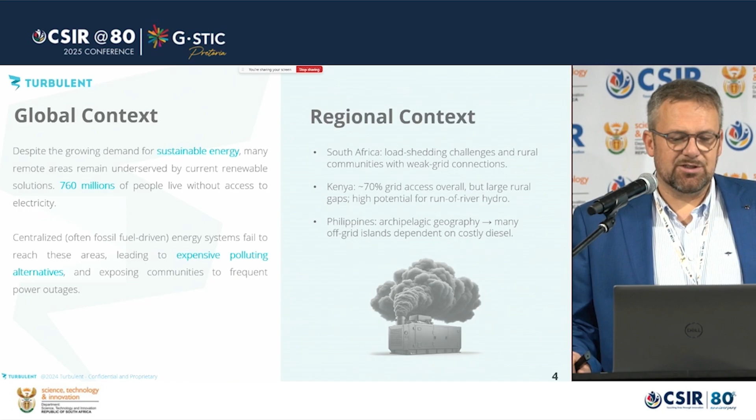The Philippines, due to their 7,000 islands, all their systems are off-grid. The most easy way is you put on each island a small generator and they have energy. That's what we want to avoid.

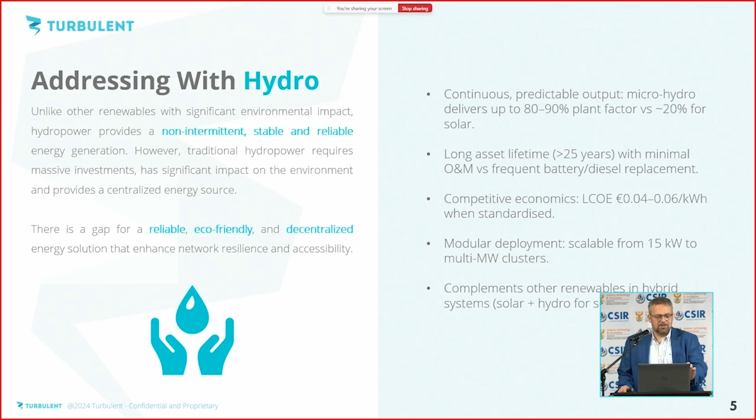What is our solution? Hydropower. So we address it with hydropower, small hydropower. We use what nature gives us. If we have a small river with 1.5 CMS of water and a small drop, we can produce energy locally - not centralized, but really on the spot where people need the energy. We don't need big dams. You will see it in the next slide.

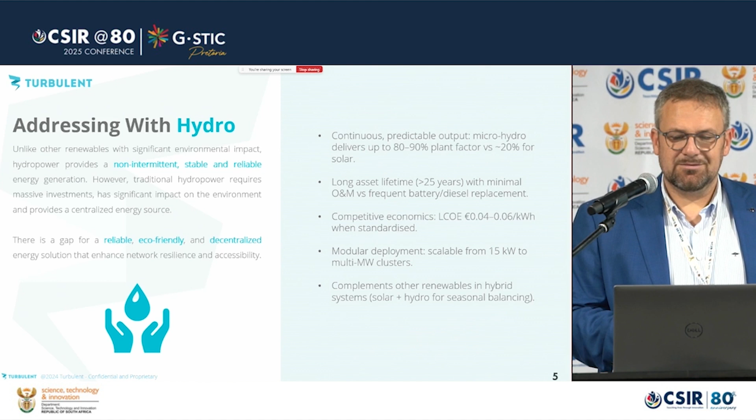So we build it on the spot, really on site where they need the energy. We don't build big dams, we don't need 4 years of permitting phase. We only need 6 months to build it and bring them the energy they need. If they need a small amount of energy now, we can deliver 1 turbine, 2 turbines, whatever is needed. If they need more in the future, you just add a few. So no big transmission lines, no big dams, no harm to nature, just a small footprint aside the river, and we can go on with it.

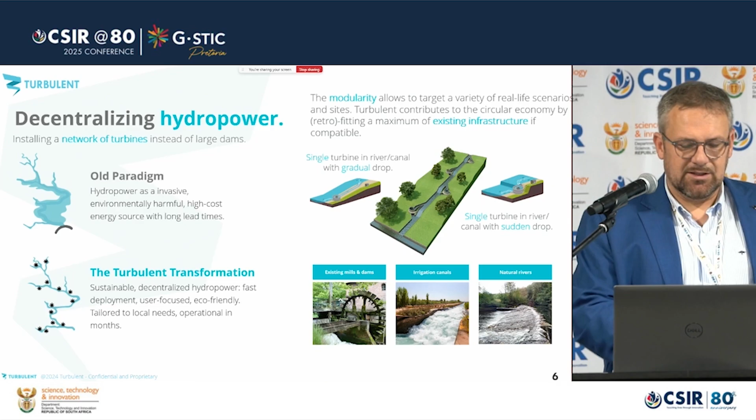How do we do it? We take the water out of the river, we drop it into our basin. The basin makes our turbine spin, and the energy goes back by our cabinets to the population.

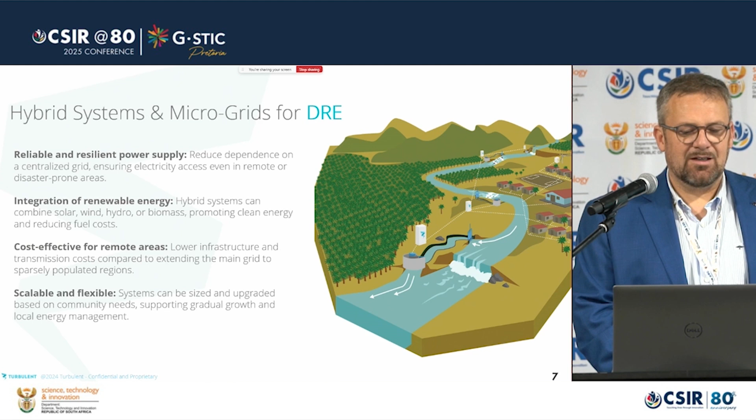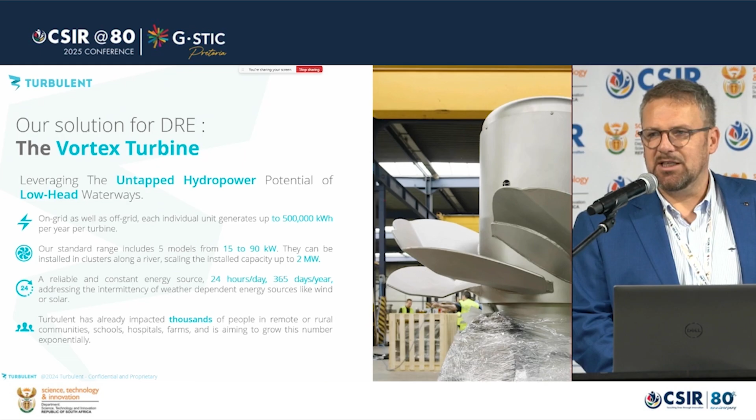How does our turbine look like? A little picture of it. So we need a generator, completely submerged. We need the impeller to make it spin, and we need a connection to the grid - or we can go off-grid, then you don't need them.

Up to 2 years ago, we made everything custom, but it was very costly. So now we've set up a standard of 5 turbines, 15, 30, up to 90 kilowatt. We can make them modular, so we can install many megawatts if needed, and if the river provides us enough head and enough flow.

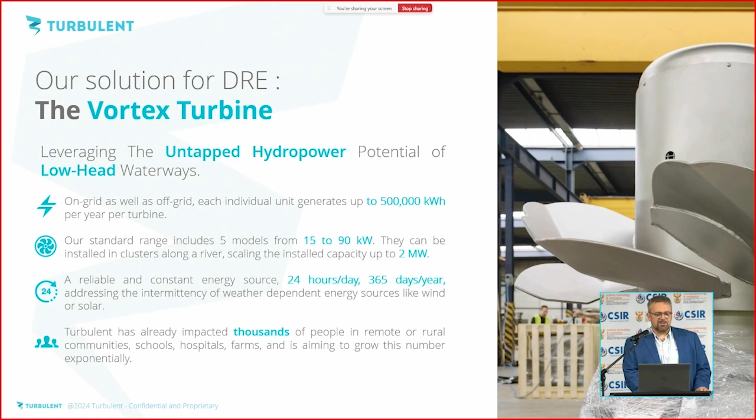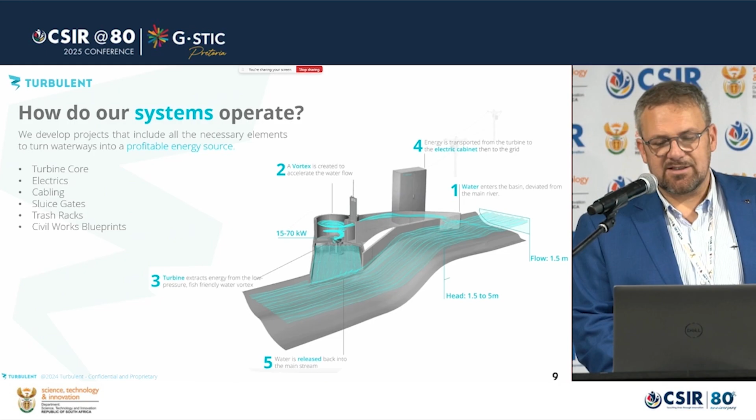A little bit, as I said, how the system works. So we take it, we use the water to generate, and we give it back to nature. We are fish friendly as well, so we have made tests in the UK, and fish pass by harmless.

A view on the turbines that were sent now 2 months ago here to South Africa. So as I mentioned, we are now producing with standards, not custom anymore, so we can make them a little bit more off the shelf, which makes it cheaper and more affordable for the people who need it.

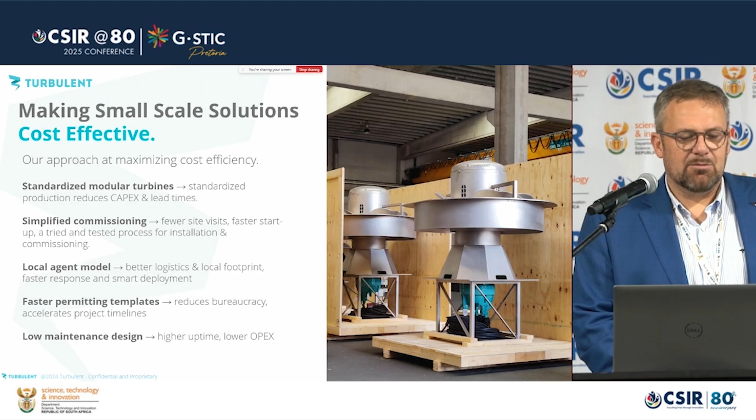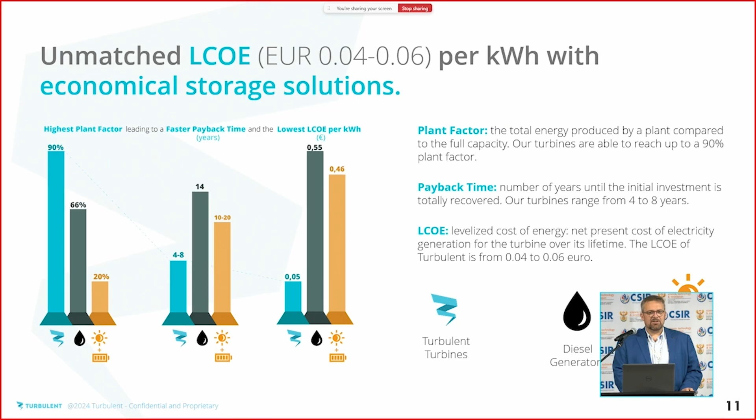Cost effective - we produce at an LCOE of 0.04 euro per kilowatt hour. It means that for a normal, good working system, under conditions here in South Africa, the payback time is between 4 and 8 years.

In contrast with diesel-fueled generators, you don't have the logistics to bring the diesel, and you don't have all the pollution that comes with it.

Where are we active? A little bit all over the world, but we realized that's too much, so now we have 3 focus regions: Eastern Europe, Africa, and Southeast Asia. If something else comes along we still pursue it, but it's not a focus anymore. Due to our capacity as a small company, we have to manage financially.

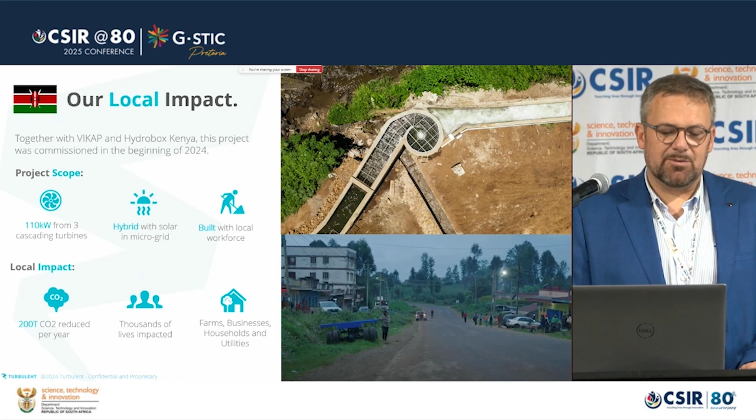The scope: there were 3 turbines, with financial support from a local partner, Hydrobox, and the Flanders program on climate change. Over there, we reduce more than 200 tons of CO2 a year. The impact is on households, and we provide energy to farms, businesses, and hospitals.

The case in the Philippines is a larger project. They are building it now, with installation by the end of the year. The turbines are already shipped - it's 8 turbines in parallel.

Why in parallel? This is specifically a modular system. We can produce enough energy here for the local rice farmers. They need the energy, but we only have a small drop, 3 meters. However, we have a lot of water because we're working on an irrigation canal, which provides more than enough water 24/7 to keep the system running. We don't involve the rice farmers directly.

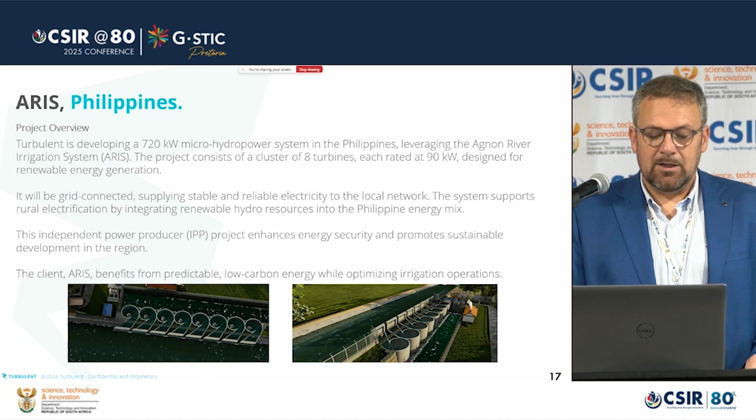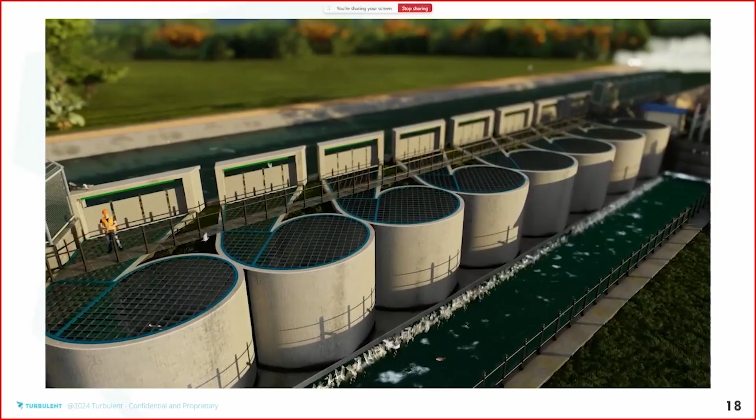We just provide the energy to the local grids so they have the energy they need, and we add more than enough to make the grid stable, which at this moment was really an issue. Here, the money doesn't come from Flanders - it's a local entrepreneur who wants to invest in this system, with a payback time of 7 years. He provides energy at 30% lower price than national energy companies in the Philippines. So it's profitable to go on with it.

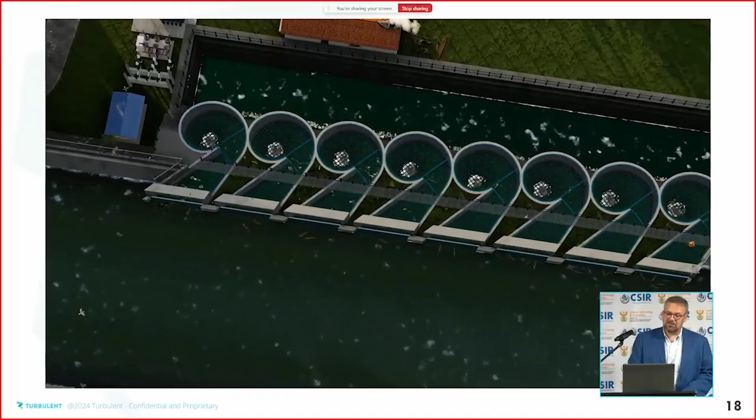This gives a little view of it. We use the water of the irrigation canal, let it pass through our turbines, and give it back after the existing dam. Why the existing dam? They build one every 3 kilometers to get enough irrigation water draining to their rice fields. Now we have an upcoming project to deliver the same system on each dam over the next 2 years.

Our local impact here is the same - we're on grid, providing energy to the local grid, making it reliable for everybody. Where is it used for? Just for local people, nothing more, nothing less. The irrigation canal was already there, so construction was minimal.

Third case: South Africa, KwaZulu-Natal. Two farmers wanted to invest in reliable energy to run their irrigation pumps, so they invested in the 2 turbines we are installing on site. You'll see a picture on the next slide.

Here, the same - due to load shedding they had issues, and by providing more than enough energy to their local system and grid, we can go off-grid for them, and when there's excess energy we send it back to the grid to stabilize it. We reduce almost 1,000 tons of CO2 every year here.

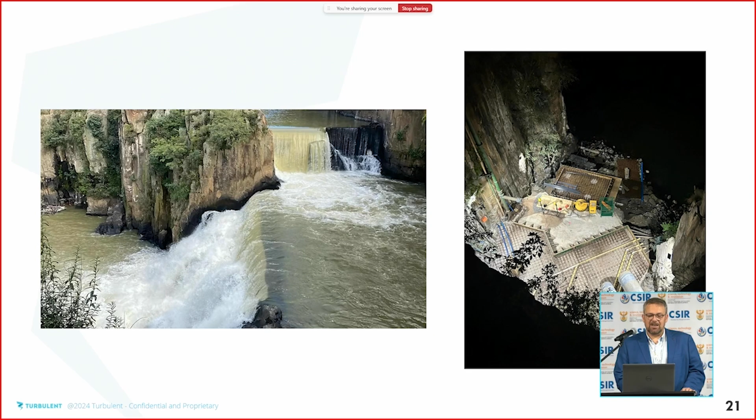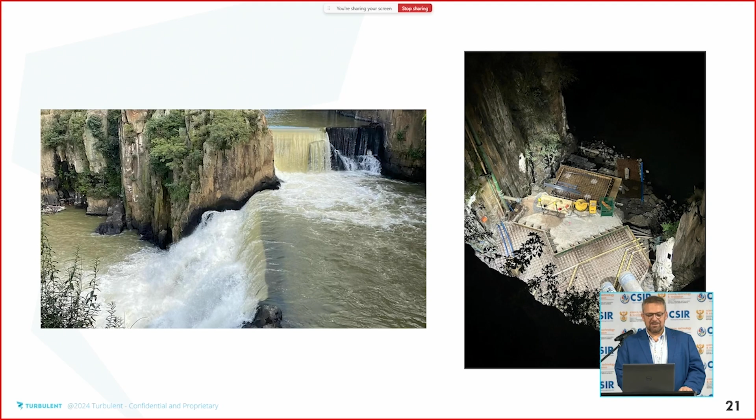No dams needed - we use what nature gives us. This is an existing waterfall, a big one, where we install right on the cliff, as you see in the picture. It's 30 meters deep, quite a challenge to build, but it will be built and finished within 1 month, so it's feasible. We use the water as it is, no dams, just take it and give it back to the river.

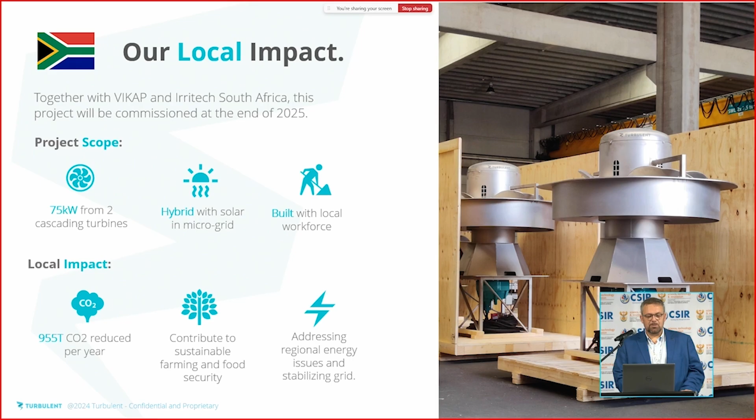We needed a pilot case here in South Africa to show that we can work hybrid, because that's essential for the future. Don't think it's only solar, don't think it's only hydro - if we combine them, we can deliver energy 24/7 for everybody. This is the proof, a pilot case that will be in use within 1 month. The scope: 2 turbines here in South Africa, hybrid with solar, paid partly by Flanders, partly by an independent farmer, running within 1 month.

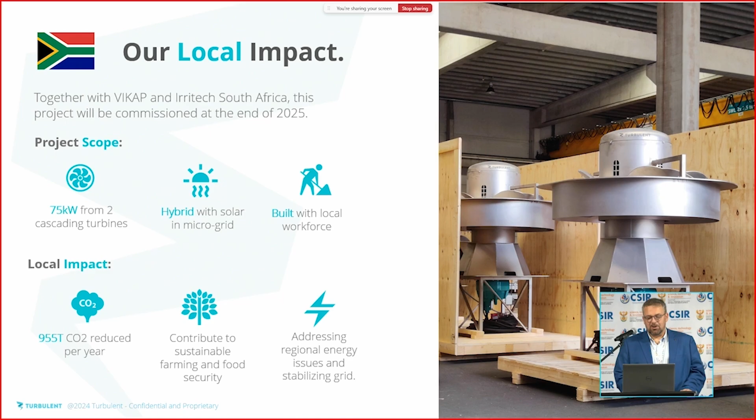What did we learn of it? Three things. First of all, technical.

Custom is one thing, we still can do it, but why standardize? Because it's cost effective, it lowers the price. CapEx is most of the time an issue for investors.

In Europe, they want to invest more and they think a little bit further. In Africa and in Asia, the CapEx needs to be very low because they will choose the most cheap and fastest solution. That's why we go for standardized solutions, standardized components off the shelf, made in a few months. Hybrid technology is also important - combine existing solutions and you will win in the future.

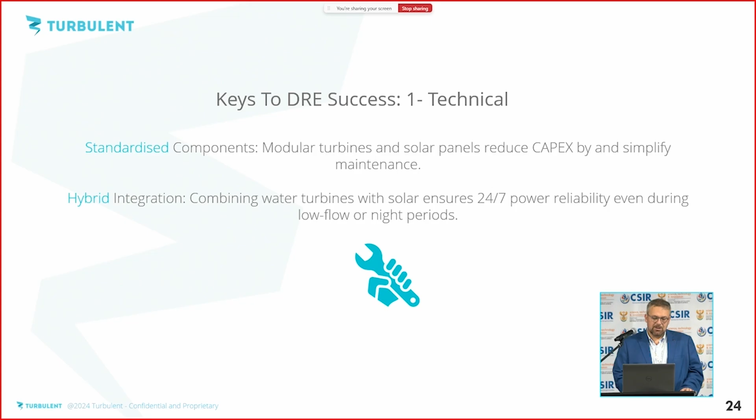Financially, don't try to build a financial case during the project - make it happen as we deliver it upfront. We provide their financial solution, their financial model, their business model, and it helps because most of the time they don't think beforehand, they think afterward. Cost effective, as I said, most of the time we need the fastest installations, so we build, install, and commission within 6 months.

Social aspect - same thing, we always try to work with the locals, for the local entrepreneurs. We need contractors, we need maintenance people, and we need local investors. We go for it, we try it out, and we see now more and more, the more they are involved, the more they are capable to continue afterwards.

The system doesn't remain dependent on us - they start to maintain it, they start to operate it, and we become less involved than before. We still keep an eye on things from Leuven in Belgium, but more and more they can do it on their own.

Stakeholder collaboration is what we are trying to do. We go to universities, we go to technical schools, we look at what is available on site to give them the chance to go on by their own, not only relying on us.

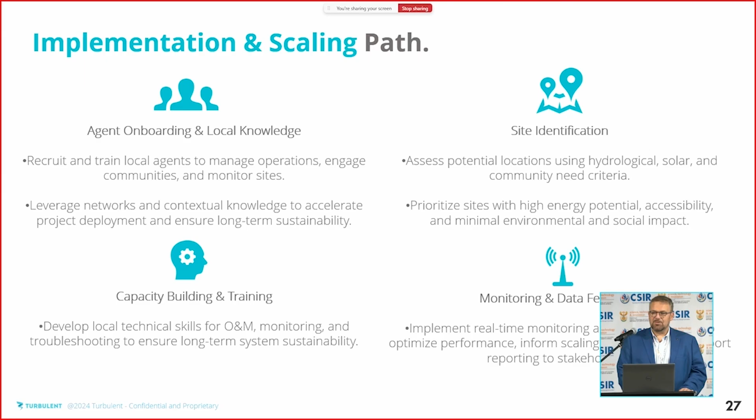As I just said, scaling up is what we're standing for. So not anymore by engaging a lot of people from our company - more and more we work with local agents. Those local agents are very well trained, they have the knowledge and they can install, invest, and commission themselves in the countries where we are active.

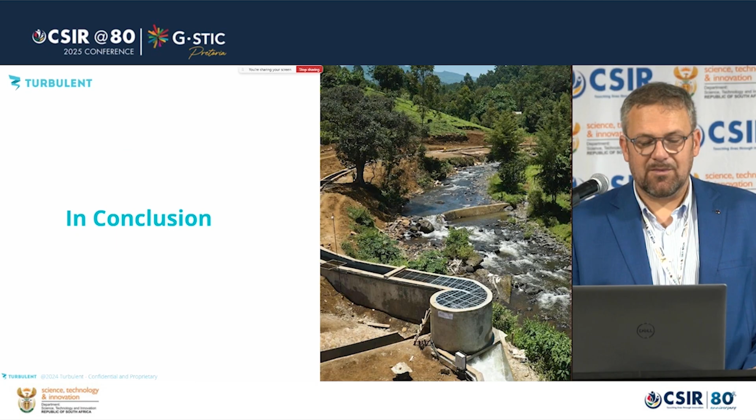Thank you for this, and I thank Flanders very much for the VIKAP project - they were a big support for us. And here our local partner in South Africa, that was Iretech. If there are questions, I'm willing to answer.

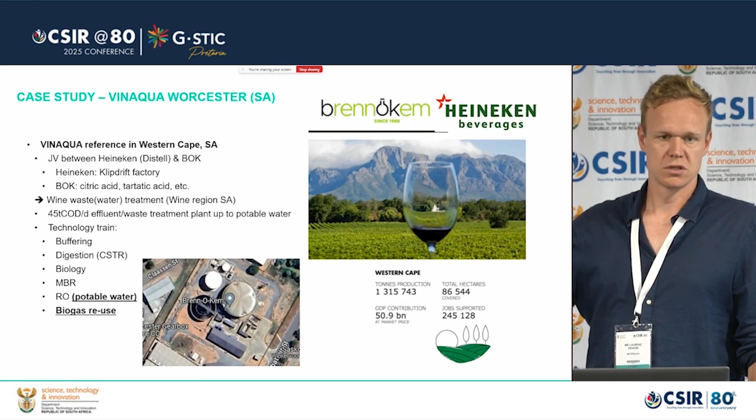The process is not that complex. It's buffering, then digestion, a biology stage, an MBR, and then RO, where we produce potable water back to the factory, a full recycle of potable water. After that there's biogas reuse, which I'll talk more about today.

So these are some pictures of the plant. It was built in 2019, a 120 million rand project, because the sites wanted to be compliant. Distell, together with Brenn-O-Kem, decided they wanted to discharge their effluent compliantly into the environment, and that was the main driver at the time, a drive for compliance.

Today we see water recovery as an economic driver, and there's also biogas recovery, where they recover biogas from the effluent and put it in their boilers to generate steam. That has, as we will see later, a net carbon reduction.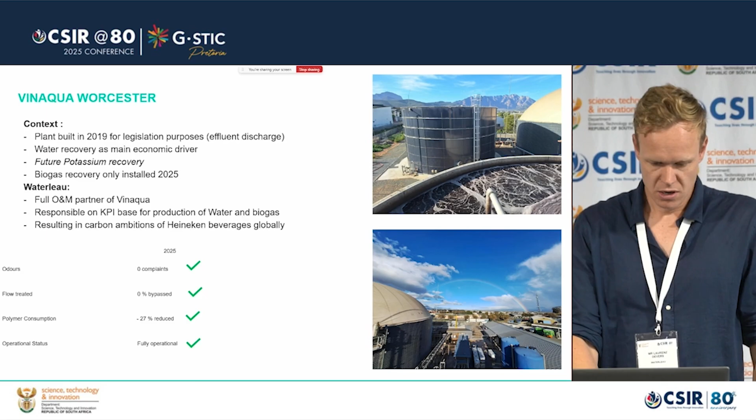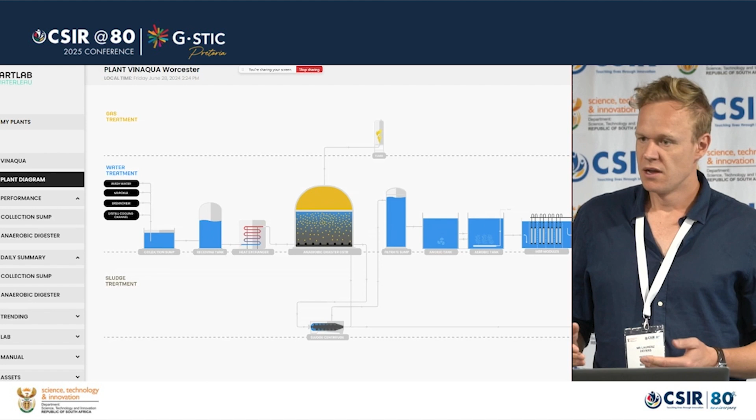So as Waterleau, we do the full operations there. It's a full operational system. We go from the buffer tank to the digester, which is the main item where 80% of the pollution is reduced, transferred into methane, into biogas, which we then reuse. After that the process goes into biology, an MBR, and then reverse osmosis.

Just a little bit on the reverse osmosis before I go to the biogas reuse. We make potable water back for the client. There's around 1,000 cubic meters of effluent coming to the plant, that's 1 million liters a day. After digestion, MBR, and RO, we produce fully ISO-certified potable water again.

That water is free of any pathogens, viruses, or bacteria. It's ISO-certified. The Flemish Prime Minister visited in 2020 and drank from the water, and as far as I know he's still alive today, so that lets you know it's fully safe. He's also paying a lot of the salaries here today, so he's still alive and well.

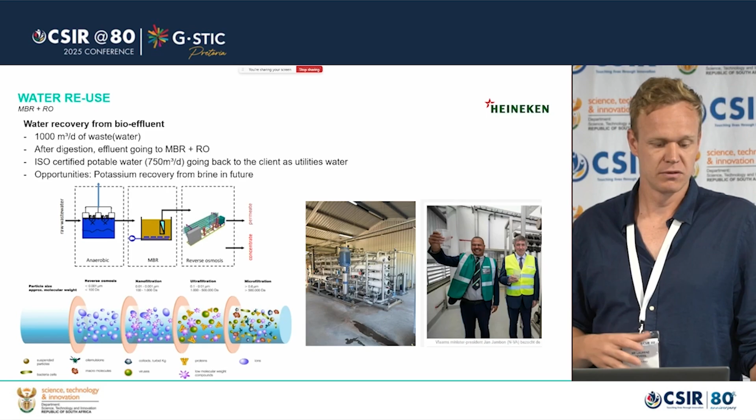So that water gets recycled fully back to potable water, which means the discharge to the environment is only 20% of what it used to be, 20% of the volume, with almost no pollutants in there.

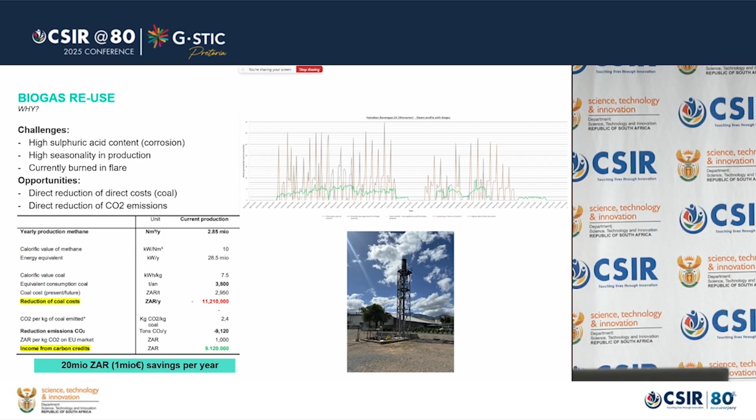Then to the biogas reuse, a recent project added onto the existing 2019 project. There are some challenges: high sulfuric content and high seasonability in production. All the waste and wastewater comes from wine production, and harvest is January, February, so we see a big peak at the beginning of the year as waste from different farms comes to the plant after they squeeze out the juice to make wine. Then there's a dead period in June, July for 4 or 5 weeks with absolutely no activity.

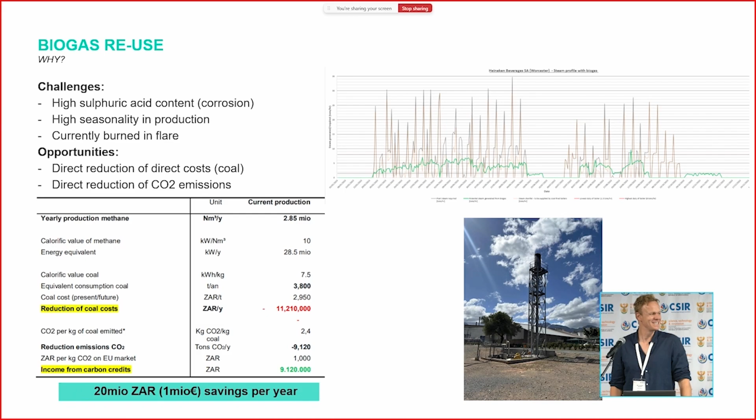We then again have an active period for 3 months, stopping completely end of November. So good for the employees there - November, December, January there's no production, so they can all go on holiday and come back around end of January when production starts again. Luckily for them the seasons fall well, with grapes growing in summertime, and December/January being holiday period.

So the business case was based on the following numbers. Today the biogas was initially flared into the big flare you see on the right, and we added a project where in total they save around 20 million rand a year in reduction of coal - around 3,800 tons of coal a year.

That coal comes from Mpumalanga, Limpopo, all the way down by the N1. If you've ever driven on the N1 and seen the big blue trucks, those are the trucks carrying coal down to the Western Cape. So that's 3,800 tons of coal a year less that needs to be transported.

That translated into a net reduction of coal costs of 11 million rand, and on top of that, carbon credits they were able to get of 9 million rand. So in total that's a saving per year of 20 million rand, about 1 million euro. The total project cost 30 million rand.

So this add-on project - the add-on that we did this year - was commissioned in August, two months ago. So the return on investment is 18 months. It was a no-brainer for them to go for that.

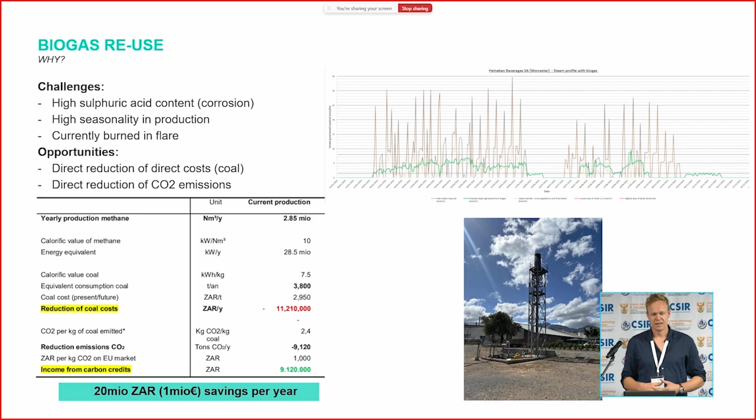On top of that, since Heineken is one of the shareholders, and there's new legislation in Europe that by 2035 all big companies need to be carbon neutral, that also helped in their global ambition toward that.

So what happened - the installation that was there... this was the installation that was there. This is the main reactor producing the biogas.

What we then did - we added drying, compressing, and a desulfurization unit. Very technical to go into all the details, but basically the biogas that comes out is methane - 60% of it is methane. It was previously going to a flare, where it was just flared and turned into CO2. What we do now is dry it, compress it, and take the sulfur out.

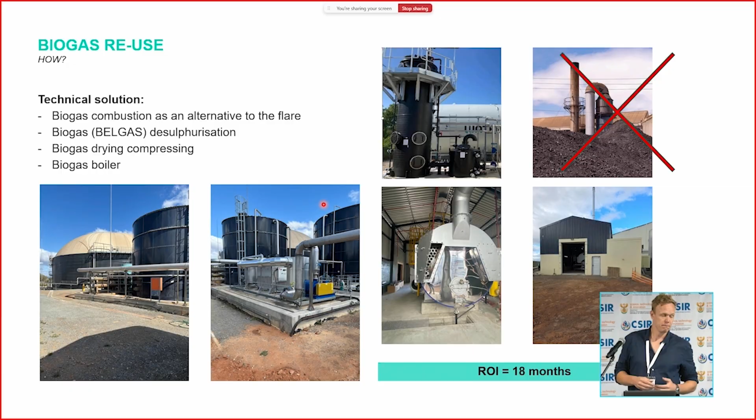Why take the sulfur out? Because sulfur is very corrosive and will corrode your piping and your boilers. So that was taken out, and then it goes to a biogas boiler and turns into steam. These factories need steam because making Klipdrift, making brandy, is a distillation process, and for distillation you need heat. That heat was previously generated by coal.

Today, as you see the cross - which isn't entirely right on the picture, but that's a detail - coal consumption went down by 3,800 tons, around 35% of the demand. So they saved 35% of their coal demand by switching to biogas, which is a byproduct of the waste.

So that's today - it's installed and commissioned, and as you can see, the return on investment is around 18 months.

And the last thing - we fully operate and maintain the plant together with our Smart Lab, which is our digital platform. We move into a digital world, so we track the entire system from a distance, from our smartphone, with different KPIs and dashboarding worldwide. We follow remotely, and we have operators on site, but clients can also follow remotely what's happening on site, whether KPIs are reached, how much OPEX we're saving - and we do that both for industrial and municipal applications.

So in Africa, as I said, we have around 150 installed base plants like this - around 70% for industries, 30% for municipalities, so we also do a lot of work for municipalities. More than half of the systems today are on our Smart Lab, where we visualize and trend the different parameters, resulting in stable operation, chemical savings, and energy savings.

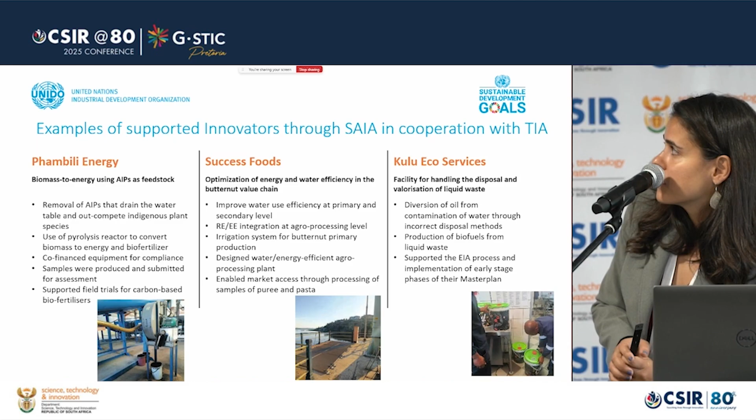Thank you. I try to keep my presentation very brief, but if you are interested to learn more about these projects, you can always go to the website of CSIR and learn more about them. Thank you.

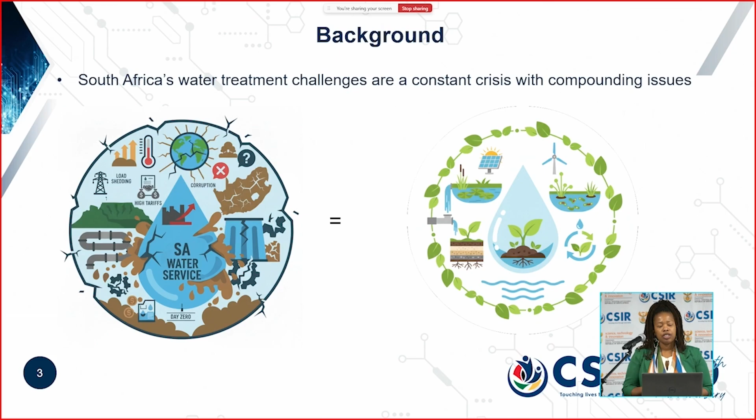Good afternoon, thank you for the introduction. I will be speaking on nature-based solutions for water treatment. As background, there are lots of issues compounding South Africa's ability to deliver adequate water service and quality: aging infrastructure, load shedding, climate change. For such challenges, we need equally robust and efficient solutions. So we are looking at the concept of nature-based solutions, the idea being nature being able to heal itself.

In our context, it's the technology of phycoremediation, which is basically the use of algae to treat or remove pollutants. From our research, we found that under aerobic conditions with very little mechanical aeration and regular dosing, we found improved water quality, improved diversity of invertebrates, and the potential for emerging contaminant removal.

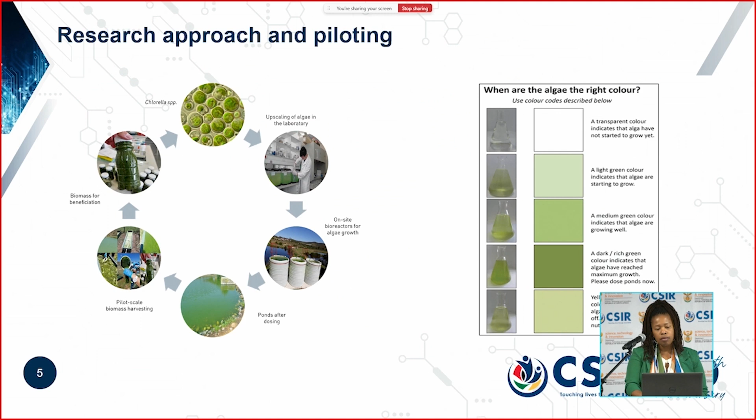The research began about 12 years ago. We started by co-culturing the algae at lab scale and found that a co-culture worked better than individual cultures of chlorella. We then upscaled the growth of the biomass in the lab and tested it under lab conditions against sewage, finding a 70% reduction in phosphates and nitrates, which was quite promising.

That led to piloting the technology in more disadvantaged communities. This image shows the bioreactors, an example of one of the sites where we implemented the technology at pilot scale. Below that is what the ponds look like when dominated by the chlorella species.

We've also tried to look at how we harvest the biomass after treatment, looking at how we can repurpose the algal biomass for beneficiation purposes, closing the loop in terms of treatment.

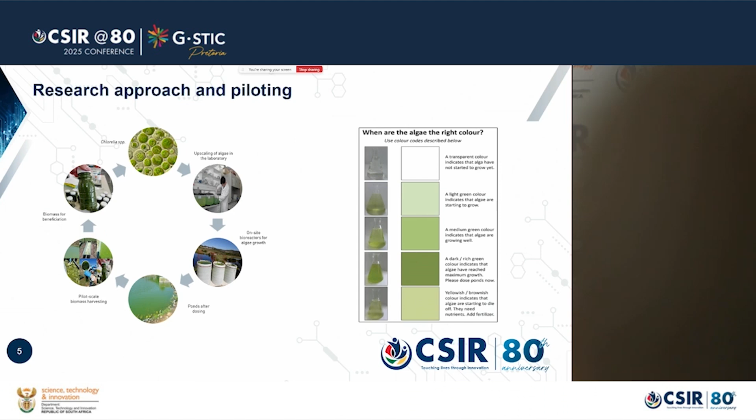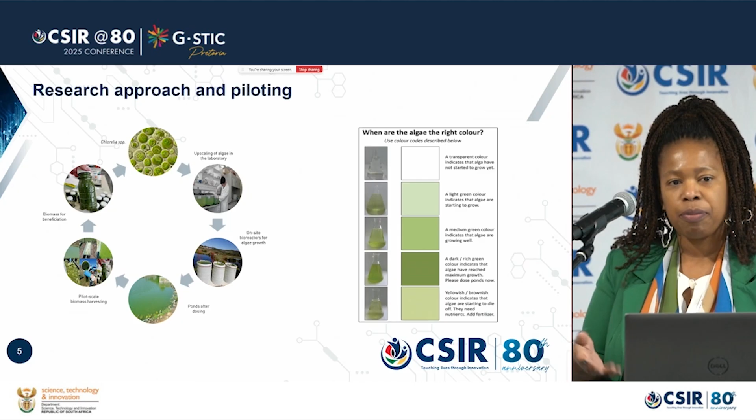We've also supplied municipalities with basic training materials. On the right will be an example of materials supplied to municipalities so low-scale operators can maintain the technology, using a basic color scheme to know when the algae are ready for dosing into the ponds or when they require additional medium, which we supply annually. We also support them with new cultures every now and again.

The studies have been implemented in 4 pilot sites so far. Our first was Motetema Wastewater Treatment Works in Sekhukhune. We've also worked with Bitterfontein Municipality in Matzikama. Through GEF funding, we did feasibility studies with some SADC countries, including a pilot site in Malawi, and feasibility studies for potential implementation in Namibia and Mauritius. Our longest monitoring site is in Mossel Bay Municipality in the Western Cape, where we implemented the technology in 2017 and are still monitoring and working with the municipality to date.

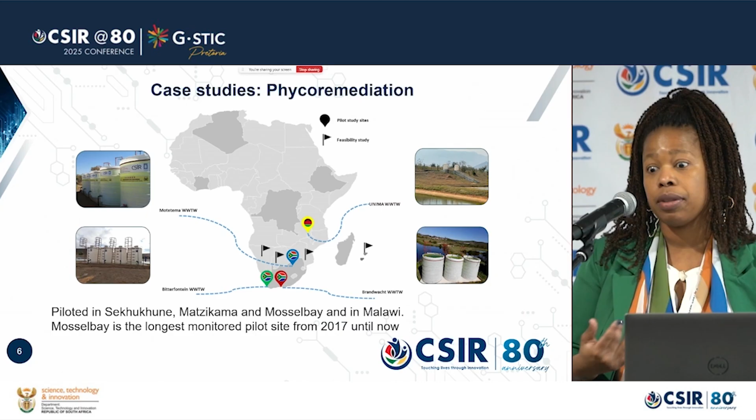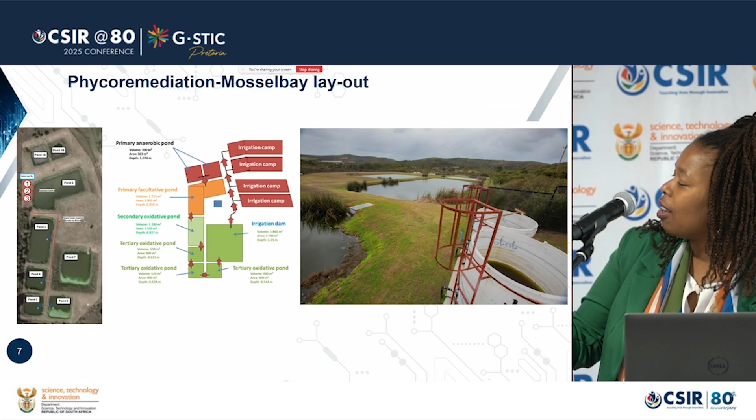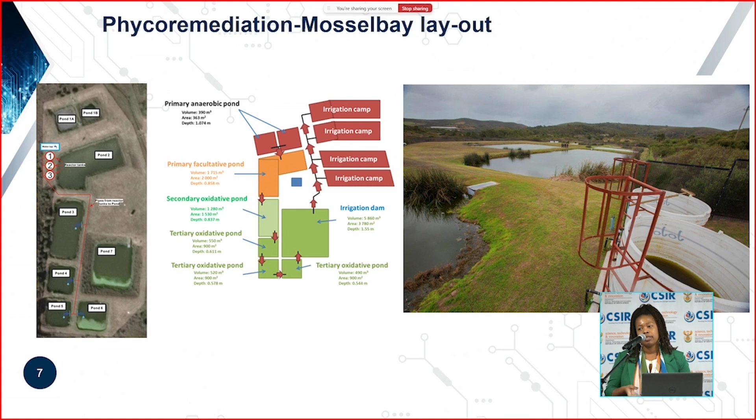This is a layout of Mossel Bay, an example of one of our pilot sites. It consists of 7 ponds, with aerobic conditions in pond 3, where we start dosing and the algae begin dominating. As the algal concentration increases, we expect an improved water quality output. At the outlet of pond 7, the water is then repurposed for irrigation.

So how efficient has it been from the science perspective?

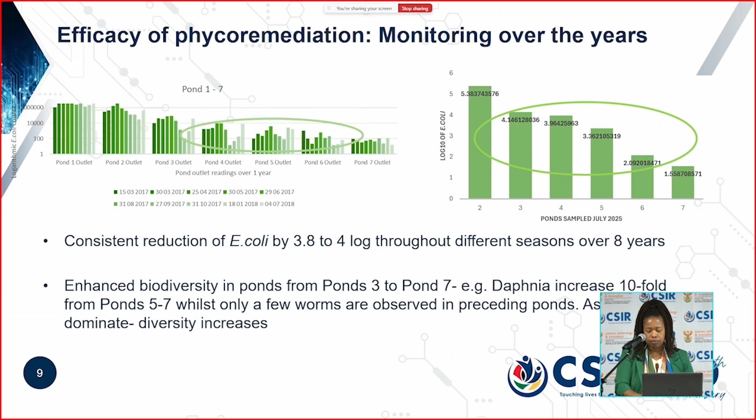We also found that Daphnia increases, so we've got an increase in biodiversity as the algae continue to dominate. This is important to raise because Daphnia is one of the sensitive bioindicator organisms, so that's an improvement in water quality. We've got about a 10-fold increase of Daphnia between pond 5 and pond 7, the final outlet pond. And then, what is the potential for this technology to remove emerging contaminants?

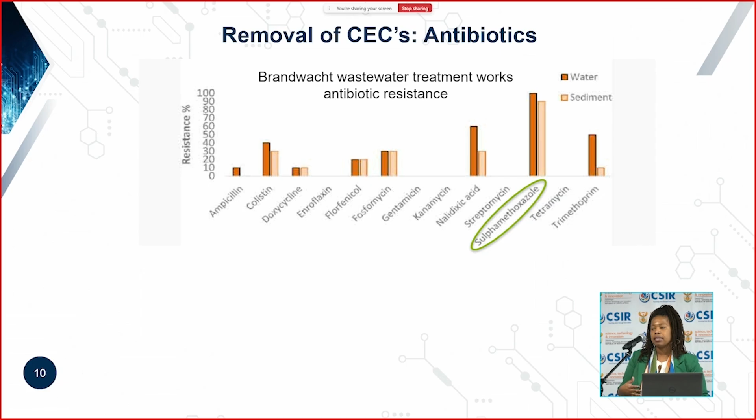We did a baseline study a few years back at Brandwacht looking at the overall microbial resistance profiles in the ponds, and found high resistance in the sediment and surface water to sulfamethoxazole. As such, we conducted a study with JPI, including other consortium partners from the EU, looking at common emerging contaminants, specifically antibiotics, and did a lab scale test looking at how the algae can remediate some of these.

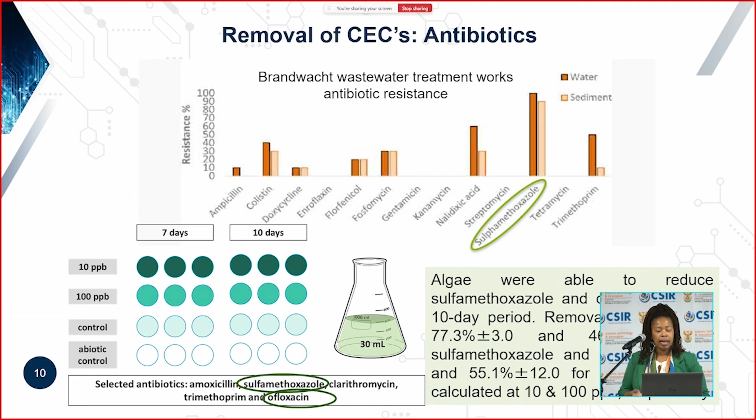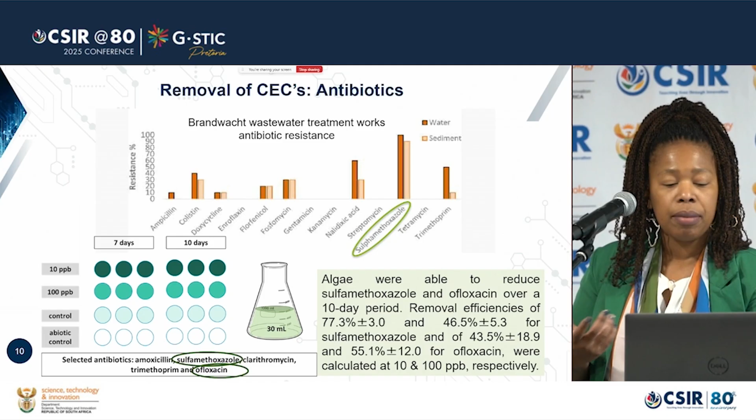Over a 10-day period, we found a very good reduction efficiency of environmental concentrations of antibiotics, specifically sulfamethoxazole and ofloxacin. For the others, we really could not quantify the measurement due to the instability of the actual antibiotics. So we found a good reduction, which brings us to the point that there is potential for emerging contaminant removal beyond just the antibiotics we have tested.

So what are the challenges and prospects we found? We really need to optimize how we harvest our biomass. It takes a very long time to dry it. We've tried to use very low energy approaches, but because of weather, rainfall, and those kinds of things, it takes a very long time to harvest the biomass. And because the cell size is between 2 to 10 micrometers, we can't always efficiently settle it out of the solution or out of the effluent.

So we really need to look at that, and also to optimize how we actually culture the chlorella species. We're looking at solar bioreactors to maybe speed up the time it takes for us to get a reasonable amount of biomass.

One of the key challenges is that the most vulnerable municipalities or communities are the ones that need the technology the most, yet they are not in a position to put funding forward to support this. So it becomes the CSIR constantly maintaining and supporting these municipalities. That is where funding becomes critical for us to further enlarge our footprint and upscale to larger treatment plants where we can have more biomass to harvest.

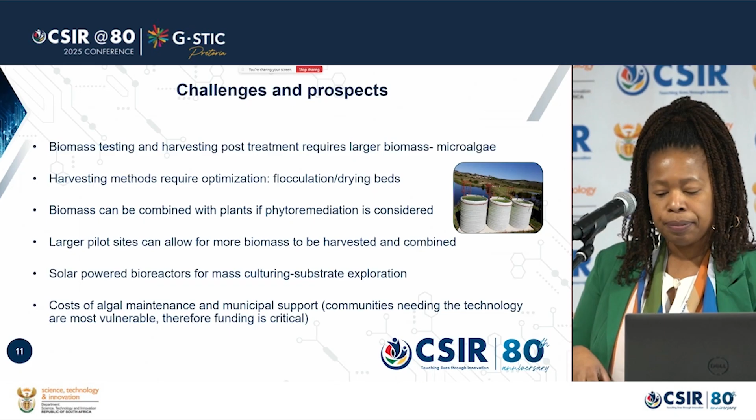Some other important linkages and further opportunities here include expanding our knowledge base within the domestic effluent space and trying to optimize how we reuse or re-beneficiate our algal biomass. We've also done some preliminary testing on industrial effluent.

We've gotten some promising results from some of the paper and pulp effluent that we've tested. More recently, we've also looked at a human health perspective, where we found that the algae have an ability to sequestrate and reduce the virulence of Campylobacter, which is linked to Guillain-Barré, a life-threatening and sometimes fatal condition. We want to see how we can further expand that through these low-cost technologies.

So those are some of the lessons we have learned, and that is where we are in terms of expanding our knowledge and our footprint in this research. And yeah, that is me. If there are any further questions, I'm happy to answer them. Thank you.

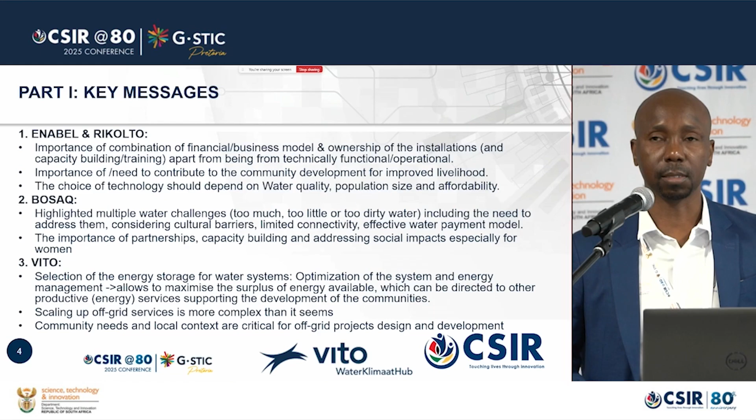When we entered part 1, there was a presentation from Enabel, which was very interesting on how they generate energy without really having infrastructure in place. By infrastructure, I mean they don't necessarily need to develop a natural system, but they make use of nature to generate energy.

Microhydro was provided as a potential modular electricity generation system which requires very low maintenance. This, in combination with solar, can provide the required energy in an isolated area or off-grid system. The need for local involvement has been emphasized.

Again, this talks to community involvement. Through local construction force, if there is a need for us to develop or construct, it is always important to involve the communities.

Some of us talked about security of the infrastructure. When the community feels involved in the construction of any development, they will also take responsibility to safeguard the security of this infrastructure. Where they feel isolated from the process, the vandalism rate usually becomes very high.